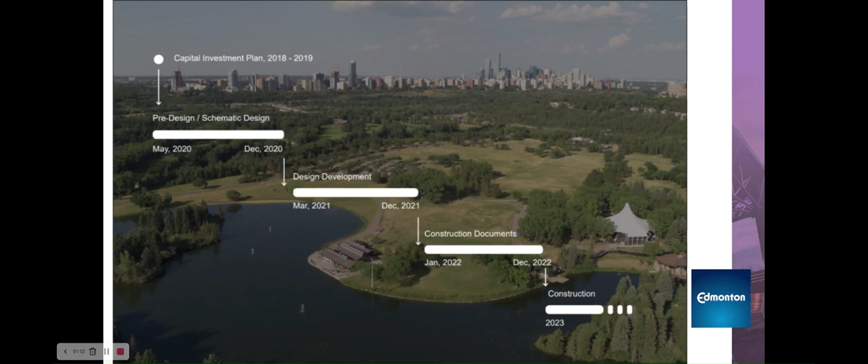Those assessments, along with the experience of users, festivals, and operators, guided the prioritization of this project and the definition of the project scope. The rehabilitation project will maximize the life of the facilities, maintain a safe and accessible environment, meet new legislative requirements, align with city policies, and ensure the park continues to meet the current and future service needs of citizens. The city was intentional with the approach to this park renewal given the prominence and importance of this park.

There are many complexities to this project. Looking at the details will provide an understanding of how the scopes of work are interrelated.

Since the development of the Hawrelak Park Capital Investment Plan, a significant amount of time has been invested with close to 100 internal and external stakeholders. A prime stakeholders group included Edmonton Heritage Festival, Silver Skate Festival, World Triathlon Series, Edmonton Federation of Community Leagues, and all the annual event groups who use the Heritage Amphitheater.

This approach provided an opportunity to do what's best for the park, not only for today, but for years to come. The plan also provided a framework for planning and design of the park, as do city policies, including accessibility, GBA, sustainability, Historical Resources Act, safety and security, River Valley bylaw, and more.

The scopes of work define what is to be done in this project. We have sorted this into three groupings, with each having its own set of stakeholders. These groupings are underground, facilities and open spaces, transportation, and environmental.

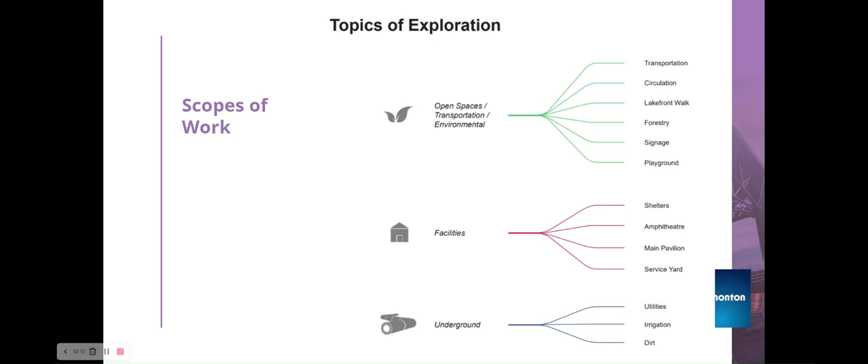Let's start with the underground. This map outlines the existing utilities throughout the park. Services were installed in the 1960s and have surpassed their 50-year design life. Many are at the risk of failure. As you can see, the utilities span the entire site, connecting the various amenities to gas, power, data, water, storm, and sanitary, as well as connecting the lake to the nearby river.

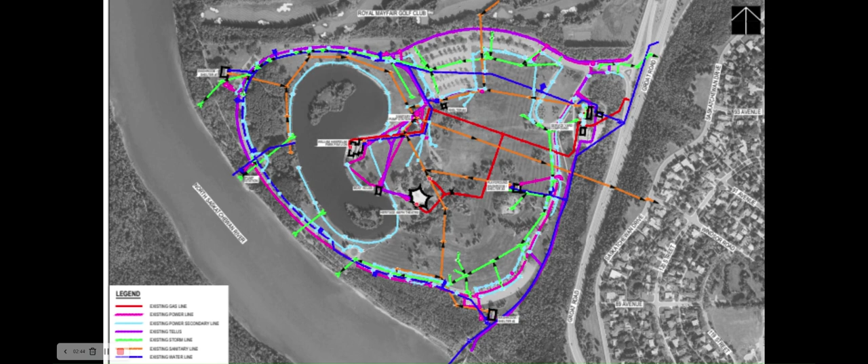This project includes a combination of abandonment, removal, replacement, and rerouting of infrastructure. Together, these total 9.3 kilometers and require deep trenching to support construction.

Another layer of the underground renewal work is the irrigation system. Irrigation is important in a heavily used park to ensure the resilience of the landscape. The system spans the entire park and must be replaced to meet provincial regulations for stormwater reuse.

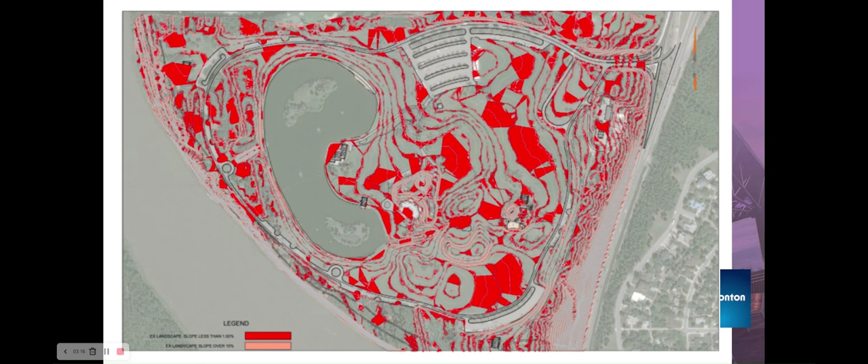The second grouping in the scope of work is open spaces, transportation, and environment. The ring road currently serves as the means for vehicles to circulate, yet it also functions as a route for pedestrians, runners, and cyclists. Improving safety on the roadway was identified as the top priority during engagement.

This will be done with the addition of a shared use path. The road itself will be renewed, which includes the replacement of the base, curbing, and resurfacing to standards that support the overall needs of the park.

We will be narrowing the road to avoid sensitive habitat and reconfiguring parking to maintain the total number of available stalls. Two options for paths and trails were developed in consultation with prime stakeholders with careful consideration for their event laydown requirements.

These options were presented to the public for feedback. This feedback was combined with an analysis of factors such as topography, seasonal requirements, tree impacts, and environmental assessment, and the option for routes inside the park road was selected.

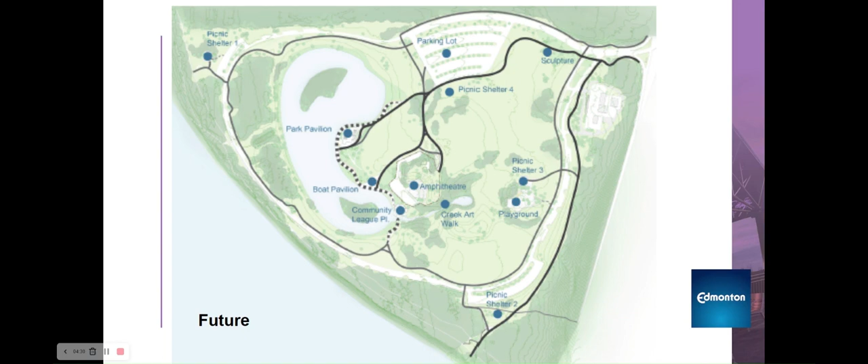The new pathways are intended to be cleared of snow in the winter and designed with consideration for minimizing the impact on cross country ski trails.

Part of the circulation route includes an enhanced lakefront walk that connects the main pavilion, boathouse, and community league plaza. Currently, there are no pathway connections between these amenities. A new accessible walkway will add to the user experience.

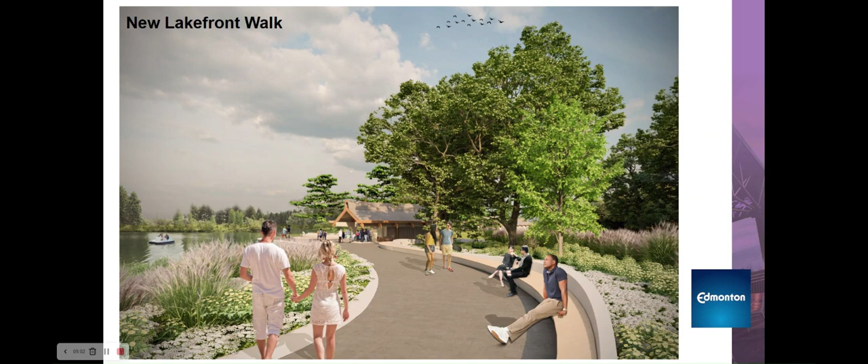Also included is the addition of a permanent dock at the boathouse to improve water access. The existing playground will be renewed with a small expansion to take advantage of the hill and berm topography for play potential.

Hawrelak Lake is a beloved feature of the park, yet due to high phosphorus levels, water quality issues continue to be a topic of interest. To improve the water quality, this project will include dredging the lake and the addition of a vegetative buffer along the shoreline to discourage geese.

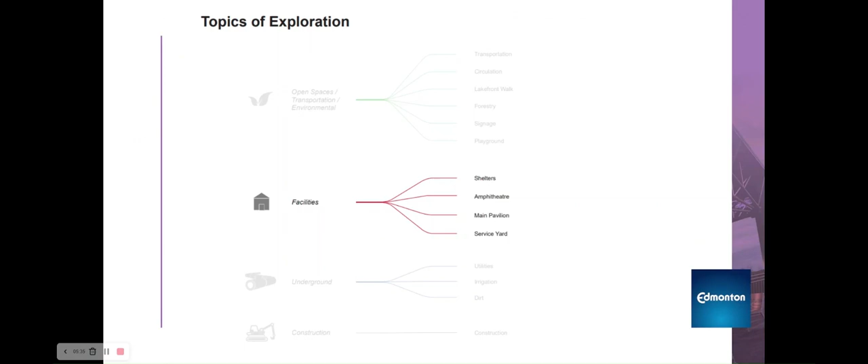The third grouping in the scope of work is facilities. The facilities on site include the main pavilion, four washroom shelters, heritage amphitheater, pump house, and the park service yard. The pavilions were designed in 1966 and are examples of organic modernist architecture.

The main pavilion and washroom shelters are in the process of being added to the inventory of municipal historic resources. The rehabilitation will be completed with full consideration and respect of the character defining elements of these facilities.

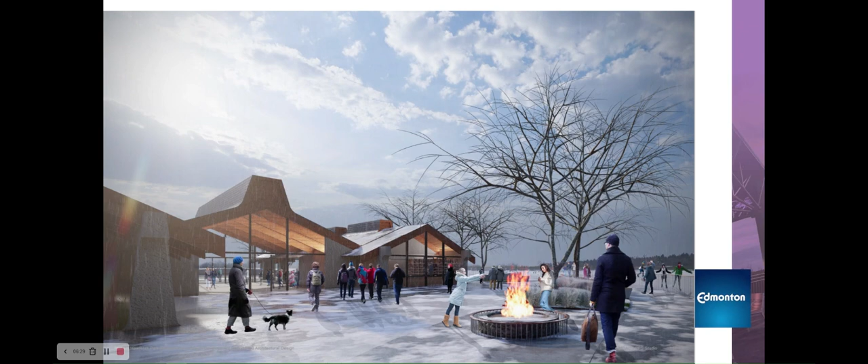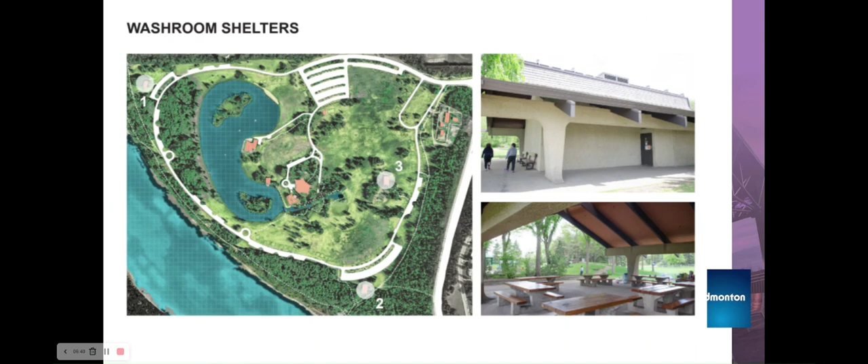The main pavilion will see the renewal of mechanical and electrical elements and a reconfiguration of spaces to improve functionality, including direct outdoor access for skate rentals and kitchen area renovations to address safety. Washroom rehabilitation includes integration of gender inclusive accessibility and CPTED requirements, as well as necessary upgrades to allow winter use.

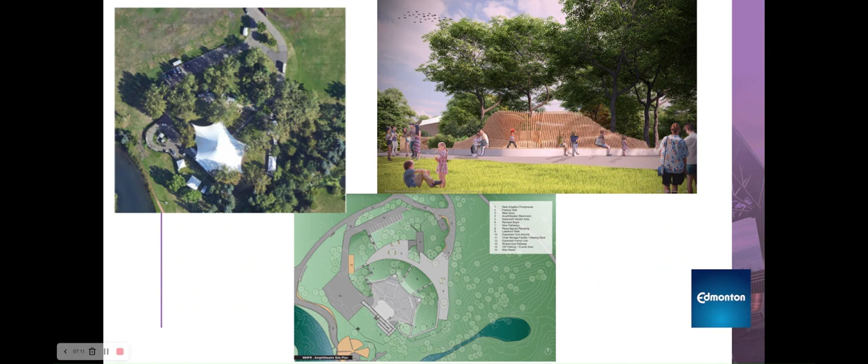Built in the 1980s, the Heritage Amphitheatre is Western Canada's largest outdoor amphitheatre. In addition to the renewal scopes of work, additional improvements will be made based on engagement with prime stakeholders. These include enhancements to the front entryway with integration of bike parking and seating, green room reconfiguration, accessibility upgrades, theater seating replacement, and conversion to gender inclusive public washrooms.

Finally, a functional program was completed to identify the renewal requirements that would allow the service yard to operate more efficiently. Operational needs have grown and changed over the years, and the current service yard facilities are overcrowded. Existing storage and operations will be optimized while at the same time accommodating the future acquisition of equipment. The improvements also provide a direct access point for the Heritage Festival storage.

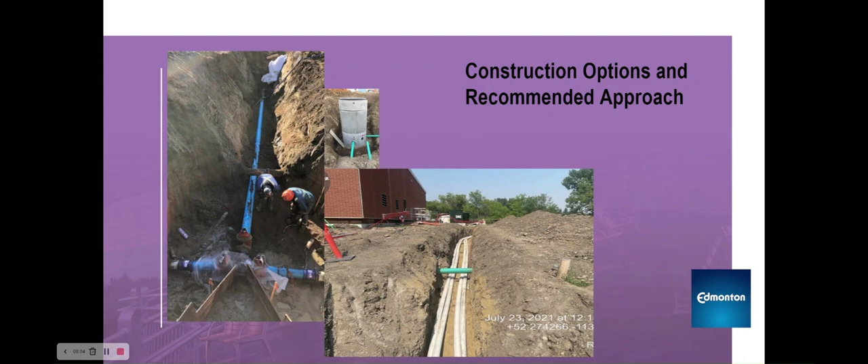In summary, the rehabilitation work of this project spans all areas of the park and ranges from deep underground utilities to all park facilities and open spaces. Now that we've reviewed what the project work involves, we will cover how the rehabilitation project will be conducted. This will include a few relevant case studies, a high level overview of the construction process, and a summary of the findings related to the recommended construction staging.

Case studies offer insights and learnings from others as well as our own experiences. The first case study is the Great Lawn in New York City's Central Park. This park area is approximately 55 acres and shares many common amenities and features to that of Hawrelak Park. It is programmed with a mix of active and passive recreation activities and includes various utilities to support its use as well. This site was also closed for a period of 2 years to facilitate a major refurbishment, including underground infrastructure.

The second case study is the recently completed Fort Edmonton Park. This project was also a composite project with a mix of underground utilities and building construction similar to what is proposed in Hawrelak Park. Beyond the scope similarities, it does share other similarities such as its river valley location, as well as considerations for festivals and special events.

The Fort Edmonton Park project was originally planned with a 2 year closure for gated patrons only. Special events were initially planned to be open, however, after the first year, it became incredibly difficult as the user experience was so encumbered that a decision was ultimately made to close special events.

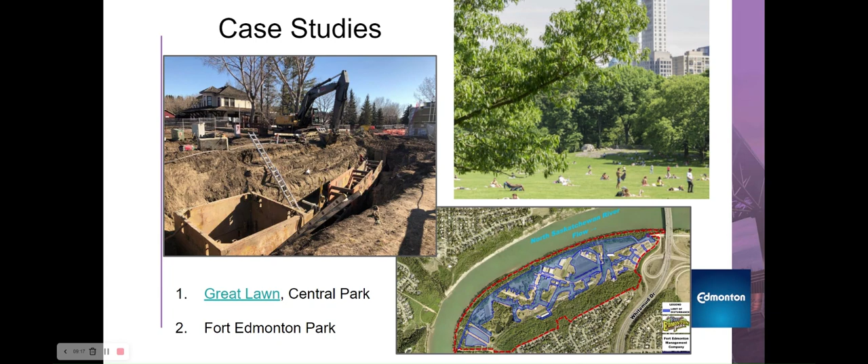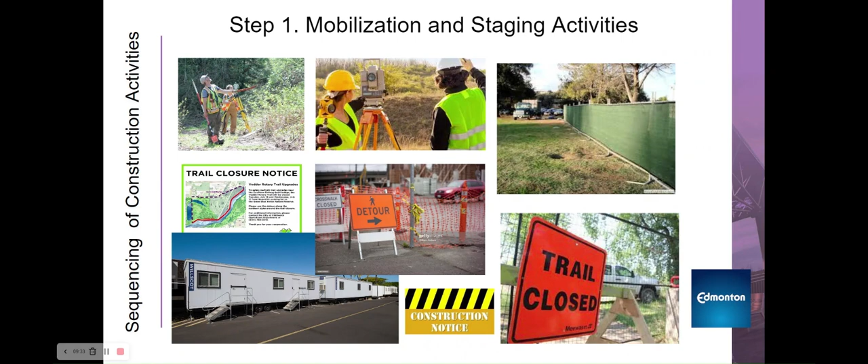Next, we'll discuss the major phases of construction planned to occur. The first step involves transitioning the site to create a safe working space and stage construction. Signage and fencing will be erected around the site boundaries. Site trailers, equipment, and materials will be mobilized. Temporary utilities, including water, sanitary, and power, will be installed.

Construction then moves into the next phase, which includes removal, demolition, and construction of underground utilities. This includes the removal of existing utilities, demolition of roads, draining and dredging the water body, and construction of storm and sanitary, or what is commonly referred to as deep utilities.

Risks with this work are weather related. Work must also be done within the approved windows provided by the provincial and federal permits for working with fish habitat in the river and avoiding disrupting migratory birds and nesting periods. This phase is the most disruptive and must be done first. This work involves heavy equipment and open excavations and spans across all areas of the park.

Underground utilities require a significant amount of space to undertake the trench and backfill activities. A typical 3 to 4 meter deep pipe installation can require up to 16 to 20-meter width in working space when taking into account both the trench dimensions with safe cutback slopes as well as the space for a spoil pile to stage the excavated material.

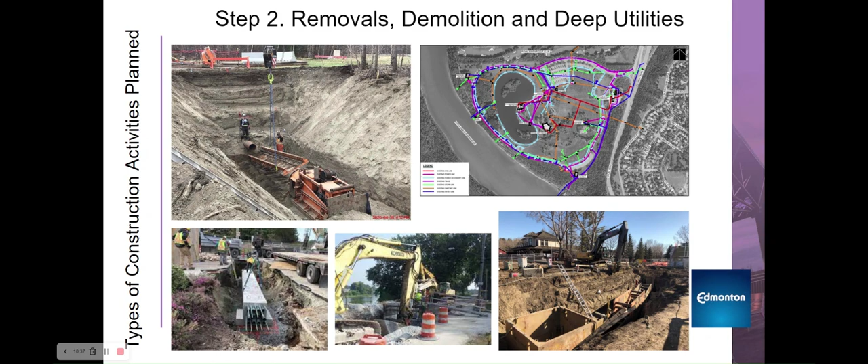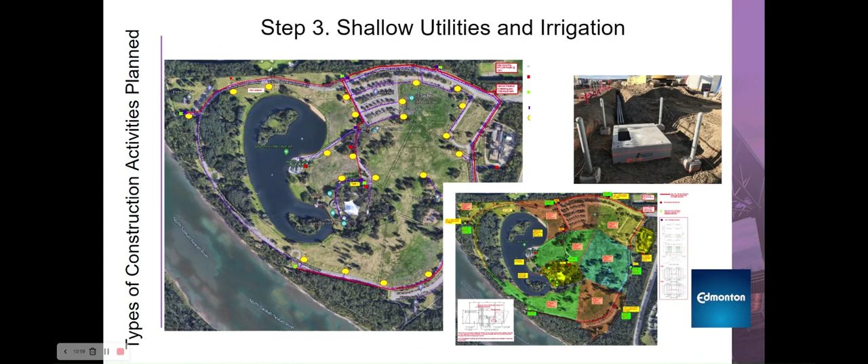Following the deep utility work is the shallow utilities. These are located within the first meter of depth and include irrigation, power, and communications. This includes installations of all water lines, power, and telecommunications within the park, as well as placement of transformers, primary distribution connections, and meter connections at all facilities.

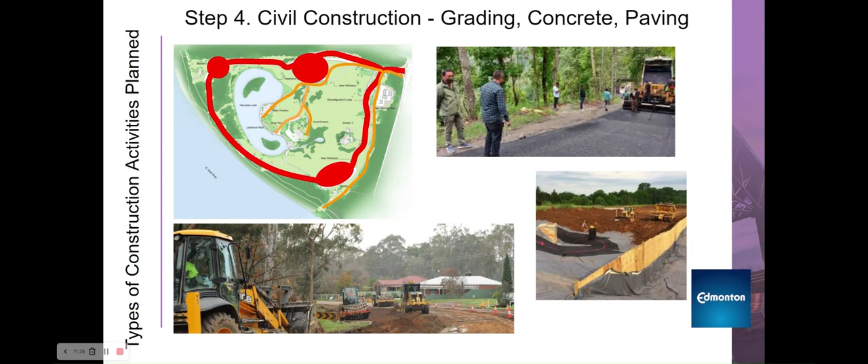The next phase is the surface level of the park infrastructure. This includes the roads, parking lots, trails, and sidewalks. Activities in this phase are weather and seasonally dependent, including earth moving, gravel placement and compaction, concrete placement, finishing and curing, placing asphalt pavement and compaction, and lane markings and signage.

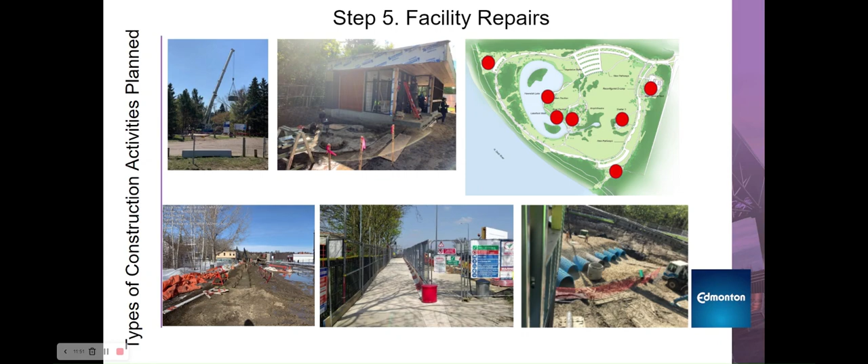The next phase, facility construction, is expected to overlap with the previous phases, where we take advantage of the schedule benefits of the full closure. Facility construction doesn't have the same weather dependencies and can occur year round. The facility work is spread out among numerous facility locations within the park and is not concentrated in any one specific area. To achieve the timelines within the planned closure, work will occur simultaneously at different facilities.

The last phase of the project includes the final grading and landscaping. While not the most complex or costly in terms of scope, it represents some of the highest risk work to make this a successful project. It is seasonally dependent and requires adequate time for establishment prior to heavy public use.

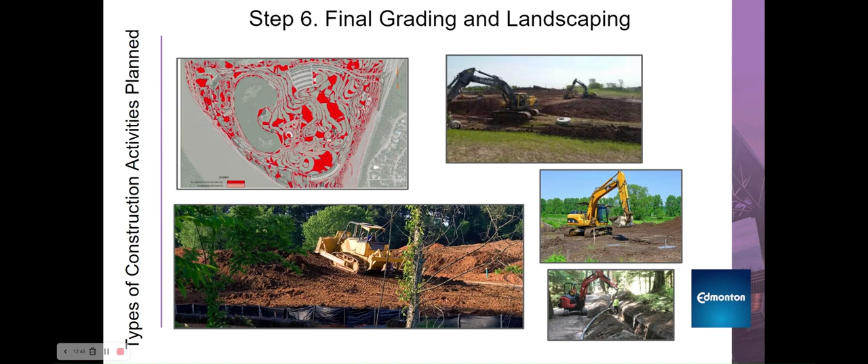This phase is expected to occur over the third year of closure, where we have sufficient time to allow for grass and landscaping to take root with limited use or traffic to ensure long term success. This will also include monitoring of the Hawrelak water body to ensure the water quality is balanced from an ecological perspective. This project, like all projects, will include a 1 year warranty period to allow sufficient time to prove out the work and address any possible workmanship or quality issues or concerns that may arise.

The project team, including city staff and external advisors such as architects, engineers, and a construction manager, have spent considerable effort evaluating the optimal approach, taking into account multiple perspectives heard. A full closure for up to a duration of 3 years is the best option for this project. This would start in spring 2023 after the Silver Skate Festival.

This was not an easy decision. An extensive team of internal and external experts were consulted along with primary stakeholders and park users. Many items were considered through the process. First was the festival accommodations.

We recognize that this has largely been the most contentious of the considerations. A phased approach would have meant having ongoing encumbered operations over an extended period of years and was not considered a desirable option either. We considered complexity and risk. A full closure reduces the overall complexity and risk significantly. The project is 3 years compared to 7 to 10 years.

We considered the construction schedule. Full closure allows us the greatest opportunity to stack activities concurrently. This overlapping of activities helps accelerate the timelines and creates further agility.

We considered cost. A full closure provides greater assurances of the total cost of the project. It will be less susceptible to inflation and market pressures as it's completed faster. There is also expected to be less temporary work that otherwise would be required when proceeding in a staged or phased approach.

We considered user experience. Our objective will be to maintain active trail detours around the park once it's fully closed to ensure that users can traverse the River Valley Trail system. Having consistent access and circulation around the area will aid users.

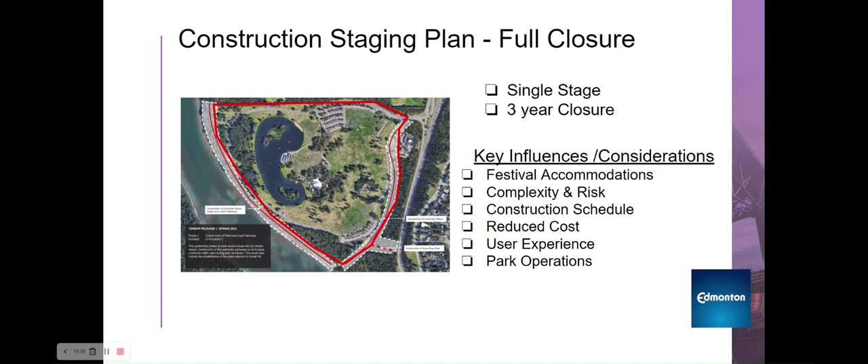We considered park operations. Addressing the full scope of work under a total closure allows for accelerated benefits contributing to enhanced serviceability and reliability. In summary, a full closure up to 3 years was the best approach for the rehabilitation project. We understand well the full impacts of the park closure to citizens, event organizers, and city staff as a whole.

In Hawrelak Park, there can be up to 50 small to medium sized events annually. The Heritage Amphitheater also hosts a number of festivals and events. There are also two signature festivals, one signature sporting event, and three Heritage Amphitheater festivals that will require relocation and support. Many of these smaller festivals and events will be relocated throughout the river valley during rehabilitation. The city is working with all organizations on their future event plans.

The rehabilitation project will begin in spring 2023 after the Silver Skate Festival. The project webpage will have regular updates throughout the project.